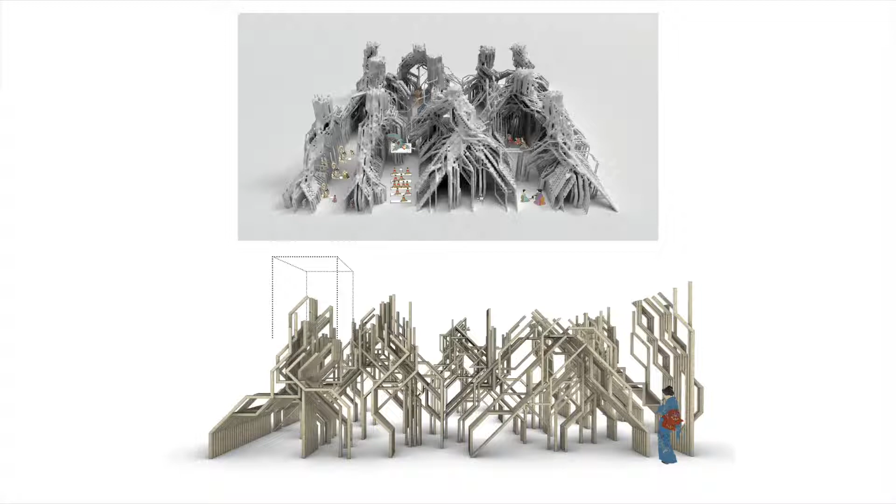As the geometry out of Processing software was taken into a complex mesh, and due to the lack of 3D printing machines or giant robots to fabricate the form as is, I started the process to negotiate the form, the resolution, the fabrication time and method, and the economical financial feasibility of the project. As I knew I would be fabricating the pavilion by hand and by simple saws, I decided to work with wood chunks of standard sections, considering the polylines out of Processing software as the wood fibers.

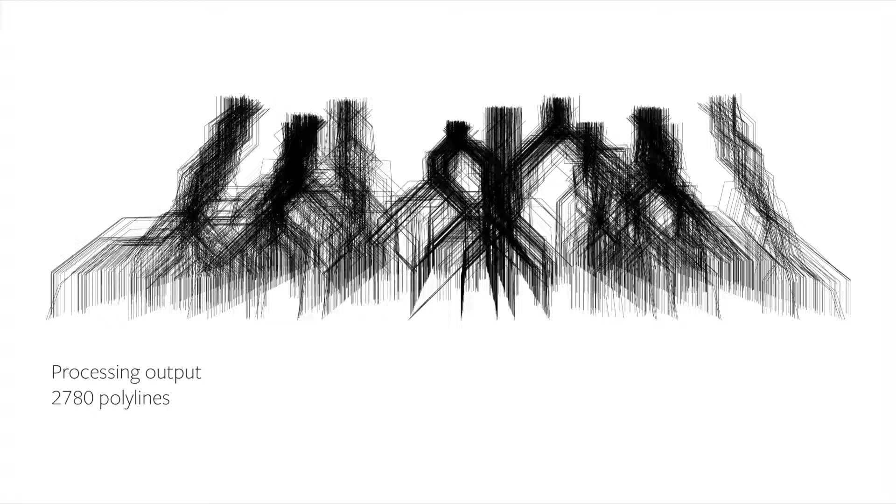The first task was to reduce the polyline count corresponding to the number of the 3D points hosted in the original pattern, and the complexity generated by the software, while not losing the aesthetics and the formal organization. Since the initial algorithm applied to transform the pattern was a flocking behavior, my assumption was that neighbor points will most likely emerge in a similar polyline.

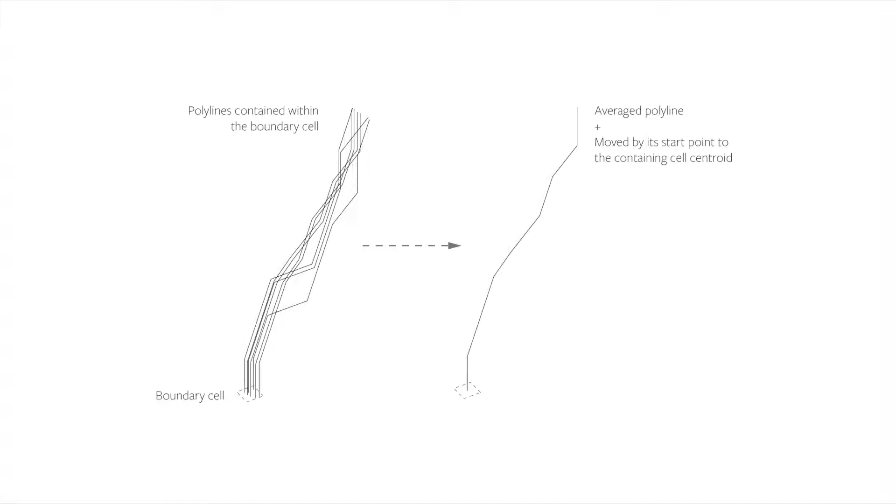I therefore generated a grid made of cells of dimensions corresponding to the standard sections of wood available on the market. A written script then checked all polylines contained within one cell using the respective starting point, and then calculated the average polyline by averaging the polyline's vertices coordinates. Through this method, the larger the size of the cell, the more polylines contained within a cell, and the lower the total number of averaged output polylines. This figure shows the polylines averaged, for example, by a 200 by 200 millimeter cell.

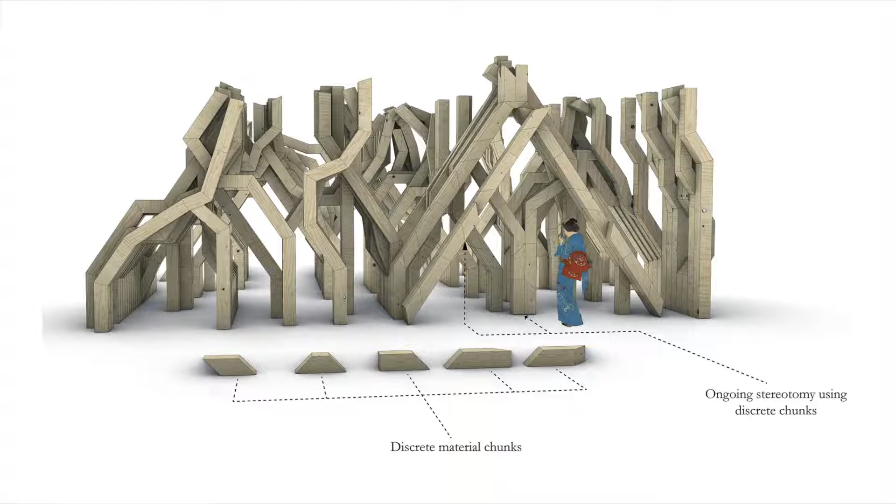Then the 200 by 200 millimeter wood chunks built on the average polylines fiber. However, I quickly abandoned the stereotomy showcased in this drawing, as the wood assembly itself generates a pattern. The surface display in an ornament is going against my statement.

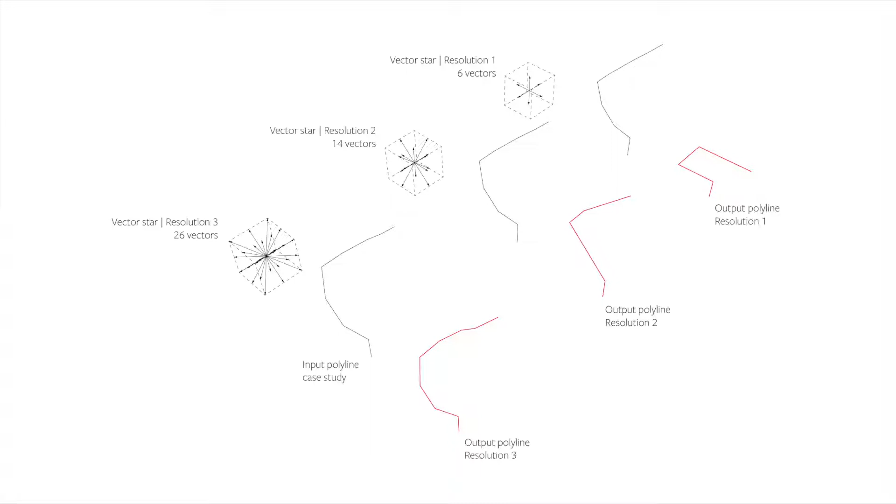Output from processing: the polyline segments were of different lengths and of different directions and joint angle values, and in order to control the complexity and variation of the joints and rationalize the fabrication, I wrote a closest vector script using 3 different vector stars to study the resolution and complexity. So this drawing shows the result of the entire pavilion through the 3 vector stars.

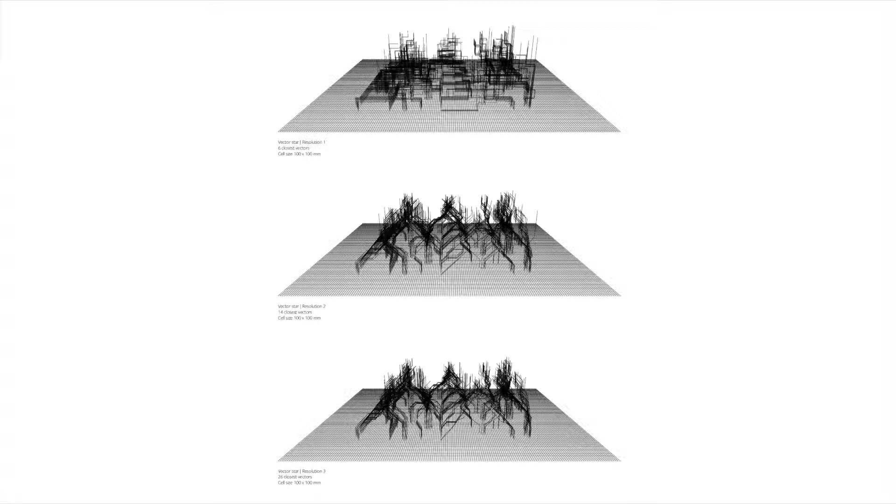The number 1 oversimplifies the form and destroys the aesthetics, and the number 3 rationalizes the length and the joint angles, but it doesn't reduce the complexity of the overall initial shape. I opted therefore for the vector star number 2, as most of the output polylines were rationalized into coplanar curves.

Being self-manufactured and self-funded, I therefore chose one cluster part of the pavilion that represented to my eyes the demonstration of the aesthetics, tectonics, and space qualities I wanted to experience through my body and that I wanted the audience to discover.

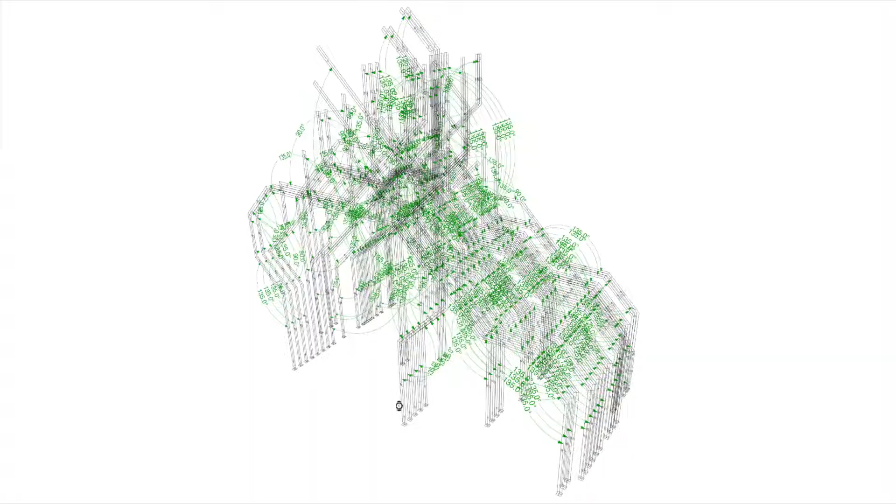My aesthetic journey has taken me to a cell dimension of 45 by 45, as in this particular project I came to the conclusion and the decision to increase the number of the polylines to stay closer to the original form, and purchased about 550 kilograms of pine wood from a wood factory in Nagano Prefecture. The following video is a small preview of the construction process.

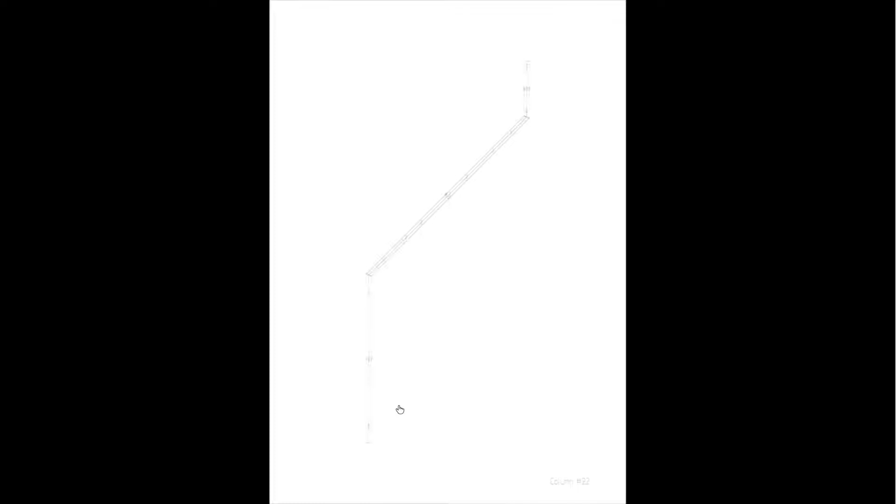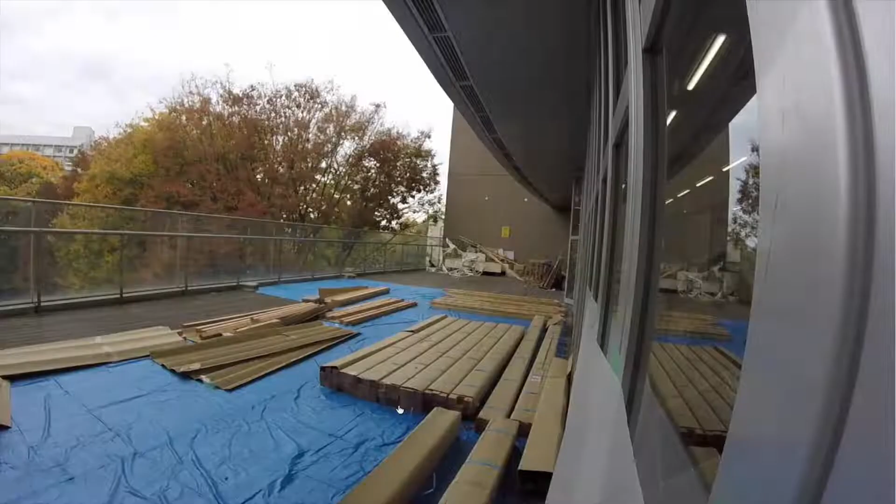A total of 317 wood chunks of lengths varying between 500 and 3500 millimeter formed 62 different columns, themselves made of 255 half-lap joints between 135 and 90 degrees. Each wood chunk was tagged with a number indicating its position and its column number.

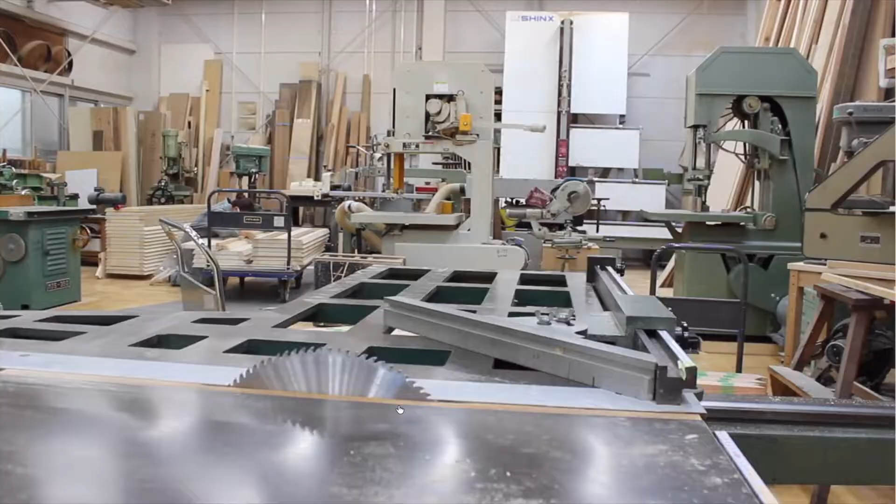So the material was delivered to me early November 2020, and the whole pavilion was entirely constructed and assembled by myself within a 3 weeks time frame, using simple tools such as a table saw to cut the wood and a Japanese nomi to cut and finish the half-lap joints.

The sticks later were tightened together by an M6 shaped 40 millimeter bolt and an onime fastener, and then stiffened with an Titebond Ultimate woodworking glue of an adhesive strength of 4000 psi. Here, finishing by hand the entirety of the half-lap joints. Then every piece is grouped together and moved to the museum for final assembly.

Finally, I also invited and gave carte blanche to Daisuke Omiya, a Japanese professional dancer, to come up with a narrative and a performance titled Body and Haptic Form to interact with the architecture and trigger the imagination of the museum audience. The film performance is available through the link.